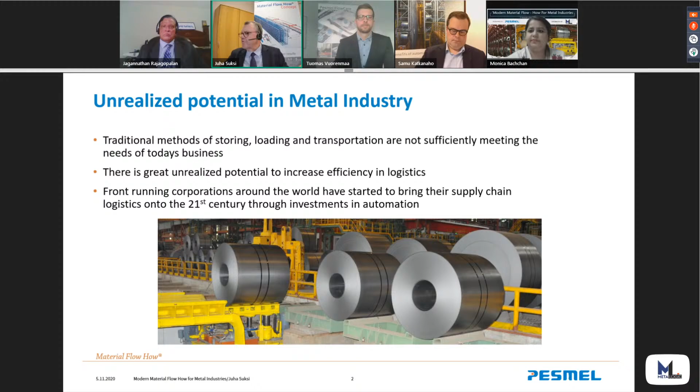Ladies and gentlemen, welcome to the Modern Material Flow webinar for metal industry. There is great unrealized potential to increase efficiency in logistics. Traditional methods of storing, loading, and transportation are not sufficiently meeting the needs of today's business. By investments in automation, the situation can be improved.

What have we learned about logistics? We can see from this image, all the way from plant to port side, that in-plant logistics and finished goods shipping functions influence the whole logistic chain. Trucks and trains transportation times are often less than 50% of the total time. Turnaround and waiting times are excessive.

There is potential to reduce turnaround time by more than 50% in plant logistics and port by equipment automation and Industry 4.0. There is also potential to reduce time on roads and rails by investments in infrastructure and Industry 4.0.

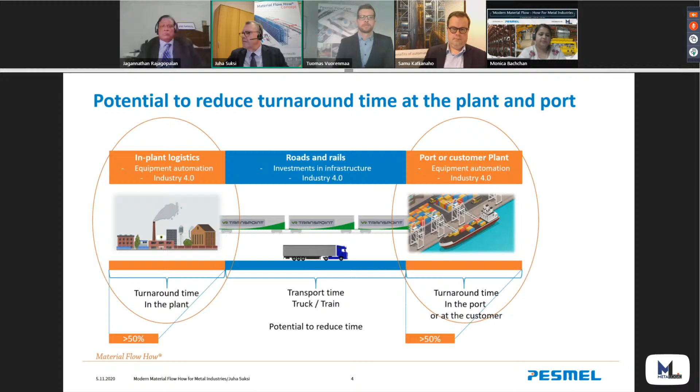So what can be done? There are many things that can be done, but we'd like to highlight the following: in-depth feasibility study, automation of in-plant logistics and shipping functions, and Industry 4.0 system integration and networking.

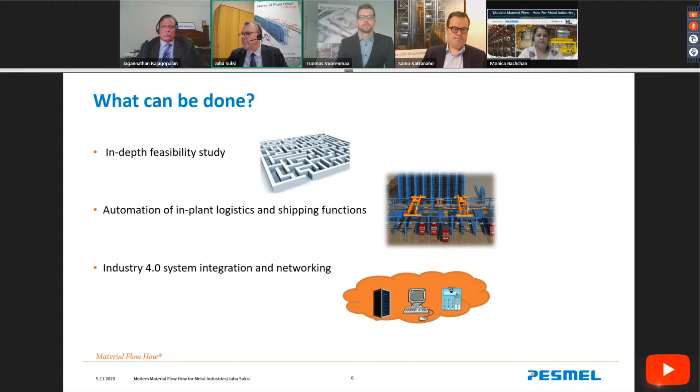During the feasibility study, we can prepare an actual 3D simulation model of production and material flows with real and planned production data, and optimize logistics, buffering, and safety functions. We find the bottlenecks of production, model exceptional situations—for example, if some equipment is on maintenance—and consider future plans.

Simulation will get validation before implementation by comparison of different solutions. It will give better overview and understanding of the processes and logistics, and we can optimize and reduce the number of equipment.

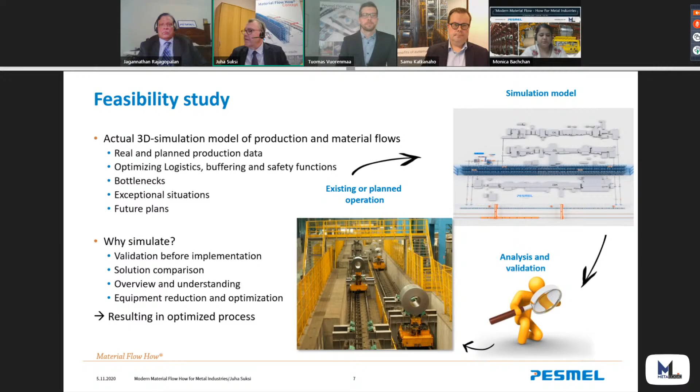The key is the coordinated material and information flow throughout the entire plant. It is beneficial that the internal logistics devices are seamlessly connected to process equipment.

If we compare traditional and high-bay storing method efficiency, high-bay storage needs only 15 to 20% of the floor storage footprint, with 1 or 2 stacker cranes. But floor storage may need many overhead cranes. High-bay storage has easy, precise access to all the products, which may not be the case with floor storage.

Industry 4.0 and digitalization give better control and understanding of every operation and utilize real-time data to increase productivity and improve controlling of the processes and change management.

Industry 4.0 can be utilized for proactive maintenance to identify potential problems before they become major problems, and give instructions on what can be done to prevent them.

GPS systems produce forecasts of arrival times and logistic-related optimization opportunities, for example route optimization and location information.

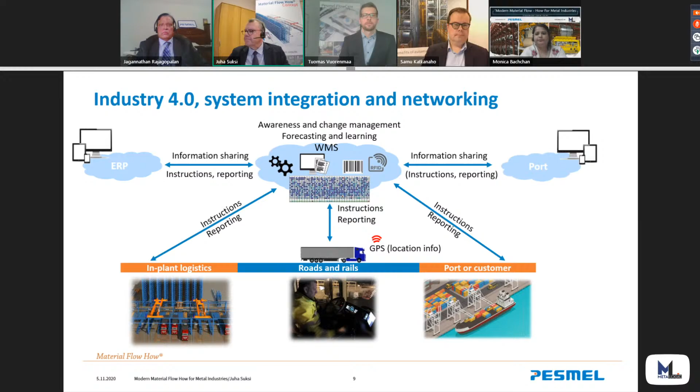One high-bay storage unit can serve all buffering, sorting, and shipping functions. Storage allocation is fully adjustable between HR coils, which can be automatically unloaded and fed to the storage, coils feeding to production lines and back to the storage, WIP coils feeding to the packing and back to storage, and finished good coils automatic loading.

The same principles can be used also for wire rod coils, billets, and sheets.

The warehouse management system is the heart of the automated distribution center, and it enables full control of all material flows inside the mill: real-time inventory, traceability, distribution, and shipping functions. And WMS is integrated to the mill information system.

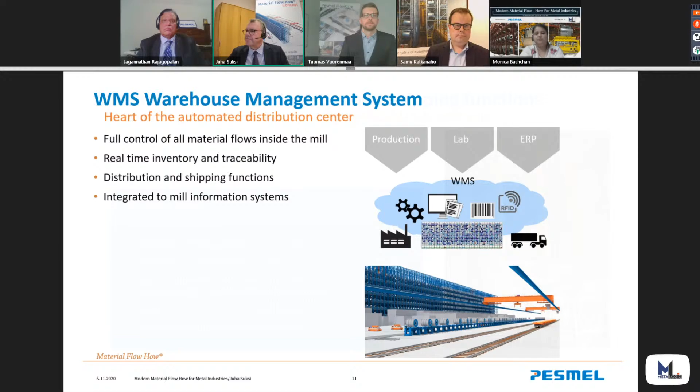As we have been working for the metal industry for decades with many customers, our running corporations are reporting significant improvements from automation in mill logistics and shipping functions, like increased sales, reduction in production cost and capital tied to products, as well as savings and error-free deliveries.

As a summary, and referring to the pictures shown below, there is great potential to increase efficiency along with enhanced profitability in logistics by well-planned and focused investments in logistic automation.

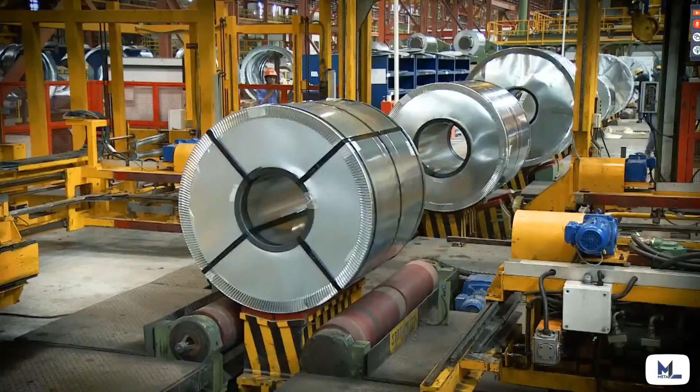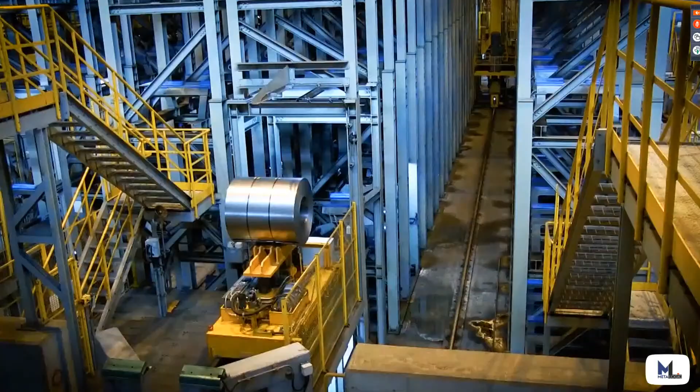PESMEL is a global leader with extensive knowledge of metal industry processes. Our core competence lies in highly automated internal logistic, packing, and storing systems. We design and implement the best logistic solutions in a manner that improves the productivity and efficiency of the entire mill. PESMEL is the master of material flows.

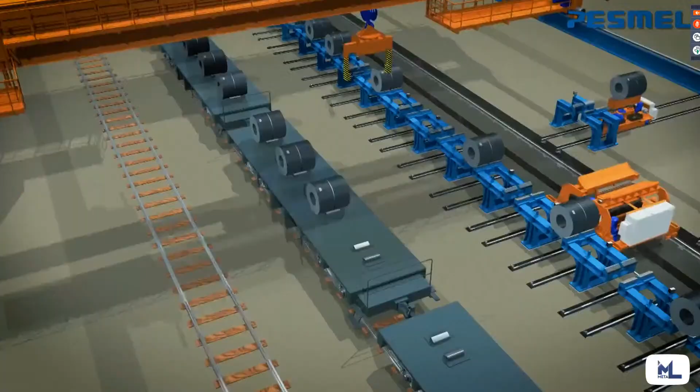At the core of everything we do is our unique material flow-how concept. It integrates all the production processes into an automatically functioning logistical whole. The system can be applied either to greenfield or to existing premises. The material flow-how concept is the optimal logistic system that enables production capacity to be maximized.

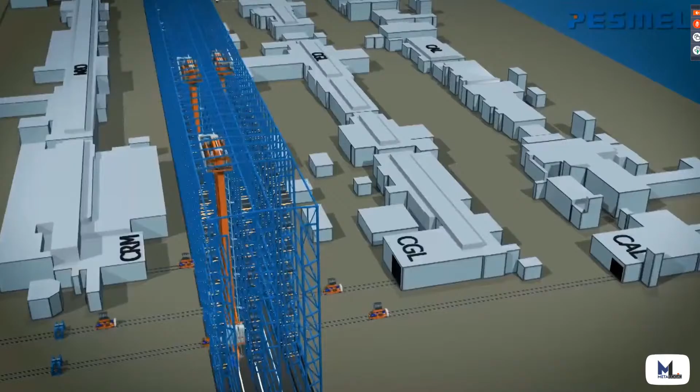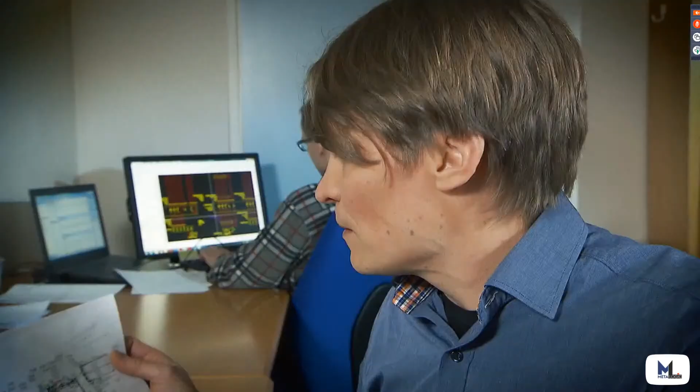First, our specialists familiarize themselves with mill processes and systems. A simulation model is then built based on this information. Through simulation, bottlenecks in production and other potential problems are analysed. Based on the analysis, a tailor-made optimal systems simulation model is then built. All this is done in close cooperation with the customer.

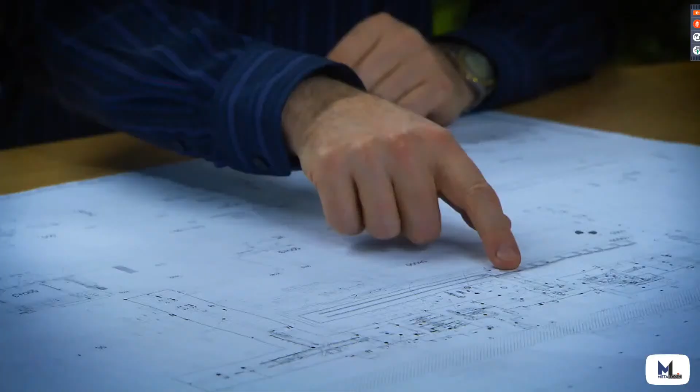Mill processes that can be defined through simulation include product transfers between the processes, intermediate storage, product packing, storing and dispatching of the finished product, and many other issues related to techniques and productivity. PESMEL takes full care of project implementation as the simulation guides all the different phases.

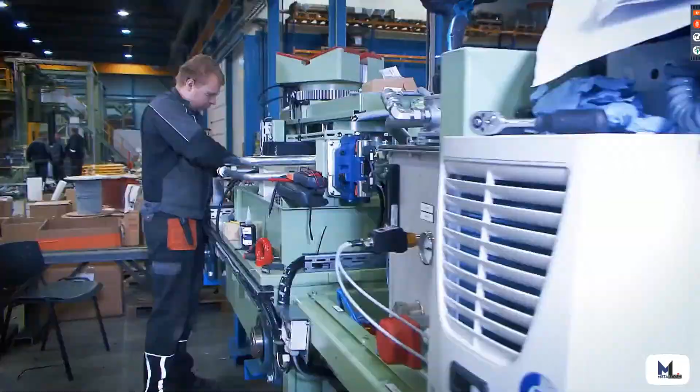One strong area of expertise is our in-house engineering: mechanical, electrical, PLC, and ICT. We build our machines by ourselves. Our engineering and manufacturing meet the highest international and local quality standards and criteria.

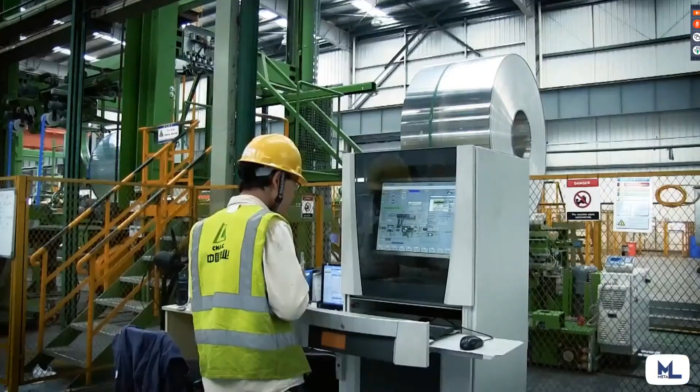The project delivery includes full equipment and system installation, testing and startup. The customer's operators are trained for independent operation, and additional training is available for the whole system life cycle. Our deliveries also include complete documentation.

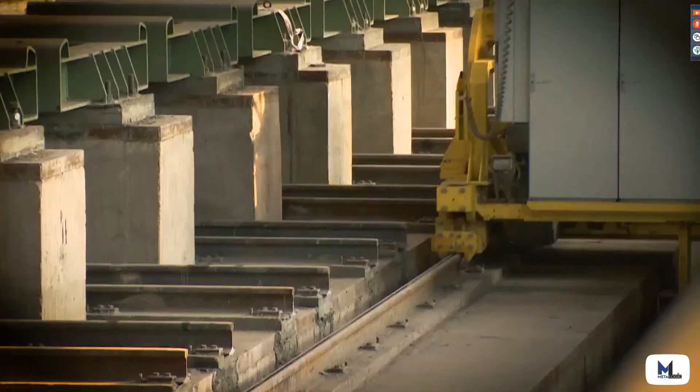An advanced control system manages the material and information flows. This makes heavy, manpower-oriented tasks things of the past. System operation is easy and user-friendly.

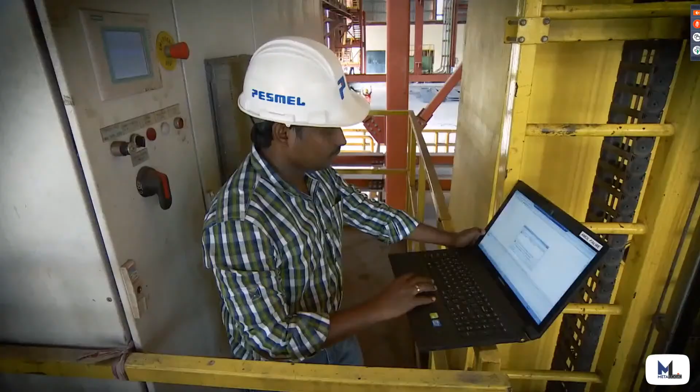The system lifecycle is managed by means of the FlowCare application. It provides current information about system performance, the condition of the equipment, and need for maintenance. This helps the operators react fast and in the proper way. FlowCare offers flexible connection to PESMEL's maintenance and spare parts service.

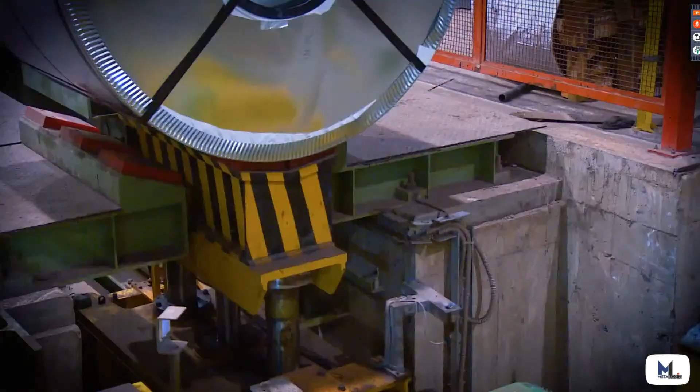PESMEL is your partner in the metal industry. We manage the mill's material flows as well as their optimal integration. Better quality, perfect deliveries, product traceability. Efficiency, reliability and operational safety, with minimized life cycle costs. PESMEL Material Flow-How.

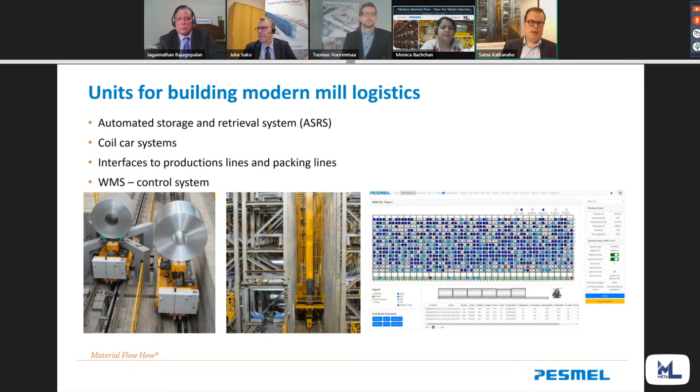High-speed coil cars complementing the EOT cranes for faster transportation, distribution, and automatic feeding. Coil cars shift coils automatically by the production plan and program and are able to handle coils up to 50 tons capacity. Special plastic pads ensure gentle handling of the coils, so no damages. Also, coil cars with turning saddles or waiting saddles are available, depending on the customer need. High-speed cars are also available to ensure higher throughput capacity if required.

Coil cars supplement and complement the EOT cranes and the stacker cranes with the common YMS and WMS. They can operate in crane shadow, so they do not use valuable floor space that much. As said, coil cars can load coils to the infeed point of the process lines and pick up coils from the outfeed points of the process lines directly without depending on the EOT cranes.

So stacker crane is a digitalized vertical crane moving inside the high bay storage racking. It is computer-controlled, able to identify and track the coils automatically at high speed with more throughput per hour. And it can work up to 34 meters high.

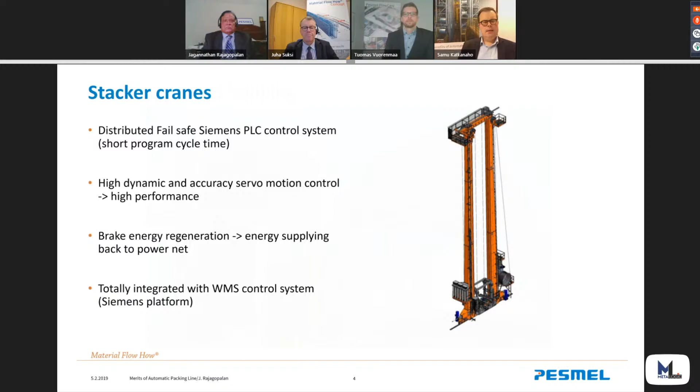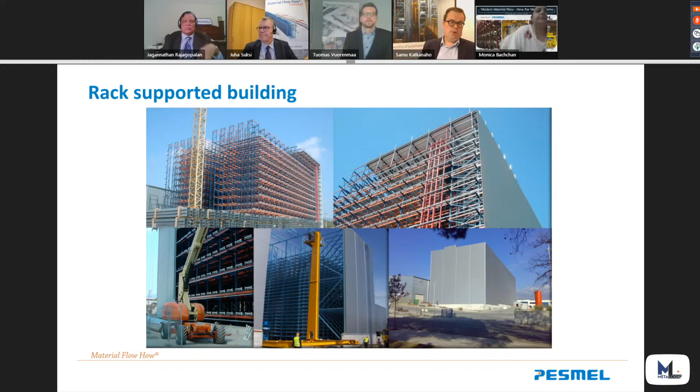So if we compare this typical ASRS to the traditional floor storage system, only 15 to 20% of the footprint is used, as Mr. Juha also mentioned. Only 15% of the power costs and 26% of the operational costs. And no human influence on the process, which also gives the safety aspect. It enables high throughput capacity, easy tracking and full transparency. So your mill can provide fast and error-free deliveries.

Some words about the overhead crane integration with automation. I will tell you the PESMEL overhead crane YMS evolution path. It's like a staircase to automation. So in stage 1, YMS guided cranes. All cranes are manual and no PLC is required. YMS gives the visual guidance and tasking via HMI to operators.

In stage 2, YMS controlled cranes, long travel and cross travel movements are automatic, and hoist movement is manual and controlled by the operator. YMS gives the guidance and tasking, and the cranes need the PLC. And in stage 3, fully YMS controlled cranes are fully automatic. So all movements like long travel, cross travel, and hoist are fully automatic, and no operators are required. Customer also has the flexibility to expand in modules and phases. So as said, this is like a staircase to full automation.

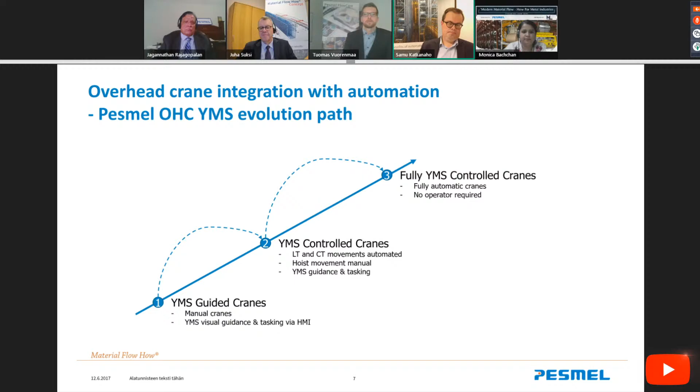As you can see, there are a lot of benefits of modern logistics. Increased efficiency, higher throughput, improved quality, faster material turnover, shorter delivery times and cycle times. You get rid of bottlenecks.

Error-free, in-time prompt deliveries, which also increase your customer satisfaction. Safe environment for the products and for the operators. And flexibility to expand in modules and phases. And PESMEL can help you to create the clear roadmap towards the full automation.

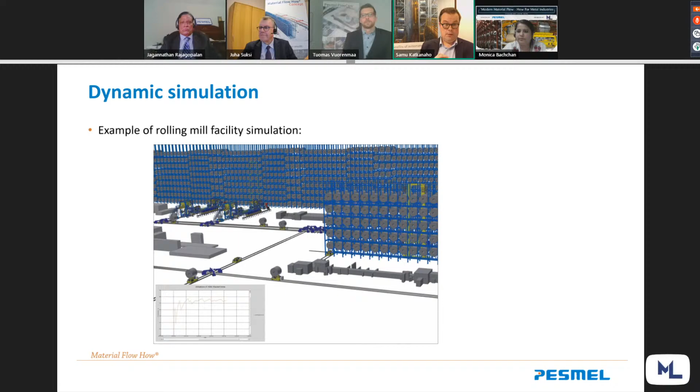Now I will ask Monica to present you the typical video of modern logistics. And as you will see on the video, no manpower is required. So Monica, kindly share the video. Sure.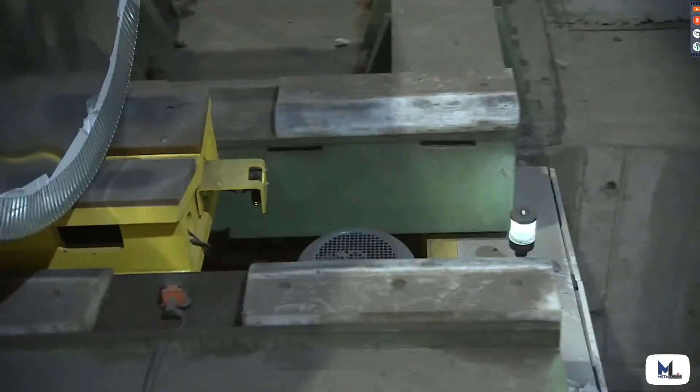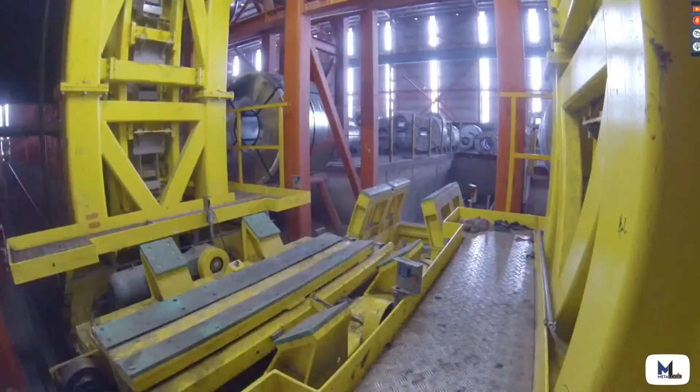And then when outfeeding, the stacker crane picks up the coil and delivers it to the exit point or outfeed point of the ASRS here. We have the moving level, so the overhead crane can pick up the coil directly there at the place we pick up. This is also controlled by our YMS.

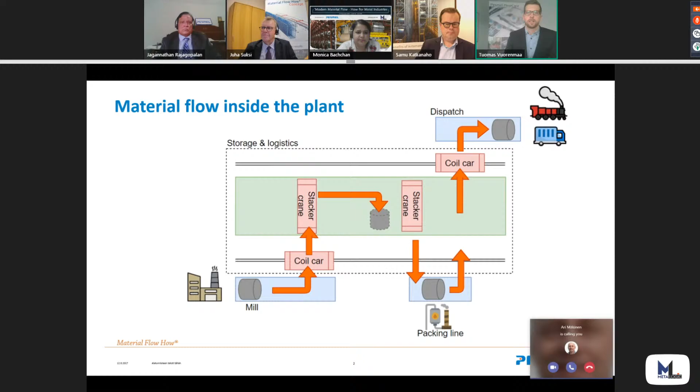My topic for today's webinar is warehouse management system, heart of the metal plant. As Mr. Juha and Samu presented earlier, material flow in a modern steel plant can be quite complex. Mills produce coils that need to be stored until further processing. Coils may need to be processed multiple times, and after each processing, they need to be stored again. And coils need to be packaged before dispatching, and again, they need to be stored in a buffer before dispatching.

The dispatching can be done, for example, via road or rail, using trucks and trains. High bay storage, together with modern logistics, can function as a distribution center, thus simplifying the material flow. The heart of the distribution center is WMS, which controls all the physical devices like stacker cranes, coil cars, coil lifters, conveyors, etc. And it's also responsible for the information flow. WMS makes all the devices work together seamlessly, utilizing all the information available, enabling the intelligent material flow.

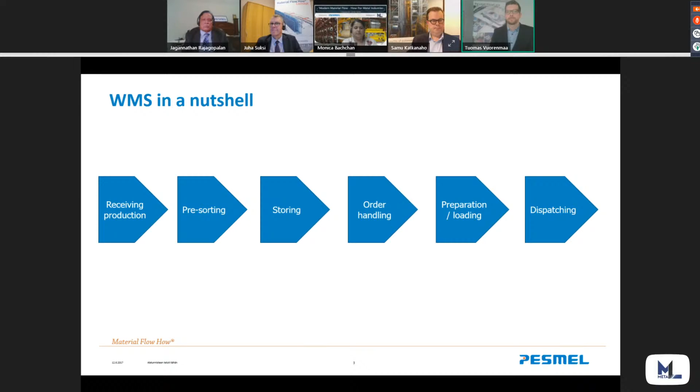A metal plant may have many systems provided by many suppliers. There can be an ERP system, mill execution system, multiple production lines, a separate system for dispatch planning, and so on. Information needs to flow in order to achieve fluent and flexible material flow. WMS is there in the middle, to help get the material and information where needed.

Since WMS needs to communicate with many different systems, various interface types are supported. For example, REST APIs, queuing systems, database links, file sharing, and TCP sockets, to name a few. WMS is working as an extension of production and dispatch planning, making sure the plan is executed correctly in the physical world.

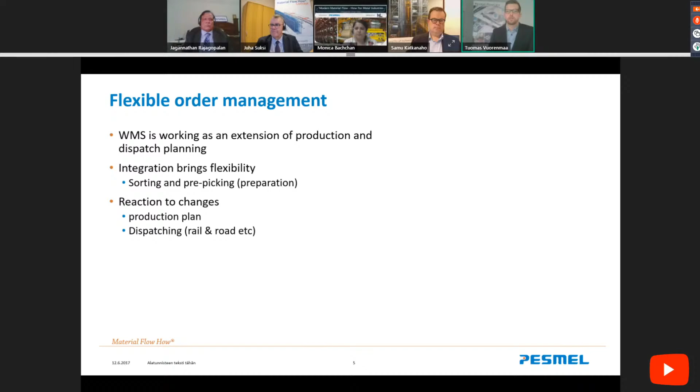WMS integration brings flexibility for sorting and preparation and the ability to react to changes. Production plan, for example, can change, so WMS needs to prepare another set of products. Trucks or trains may break or they are cancelled, so the prepared products may need to be taken back to storage and new products to be prepared to the loading area.

WMS tracks every single movement of each product, all the way from the takeover point to the dispatch vehicle. And all movements and events can be traced in history step by step. Sometimes it's also necessary to see production and dispatch orders and if changes have been made to them over time. Also, all user actions are logged, and all this is because we want to provide full transparency and give the best understanding of the whole system.

Tracking information can also be shared to other mill systems if necessary. Mill execution systems or ERP systems may need to know where each coil or product is located for planning the next processing.

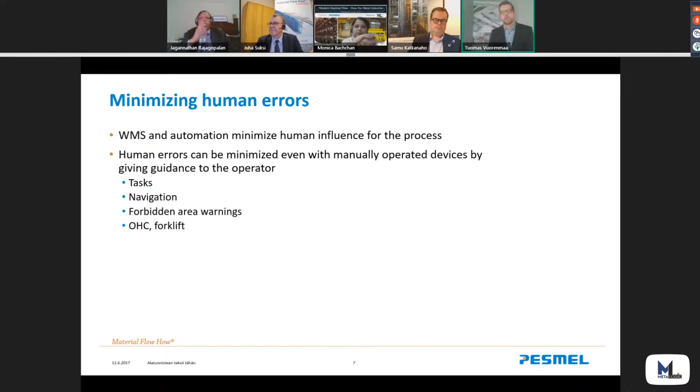WMS and automation can minimize the human influence on the process. And human errors can be minimized even with manually operated devices by giving guidance to the operator, like tasks, navigation, warnings about forbidden areas, etc. These devices include overhead cranes and forklifts as an example.

High bay storage and logistics can be supplemented with additional floor storage. WMS can be extended with YMS functionalities. This extension includes all necessary user interfaces and device control functionalities for overhead cranes or forklifts. Mr. Samu mentioned the YMS overhead crane evolution path, and that is supported with only minor changes to the WMS when moving towards more automated levels of overhead cranes.

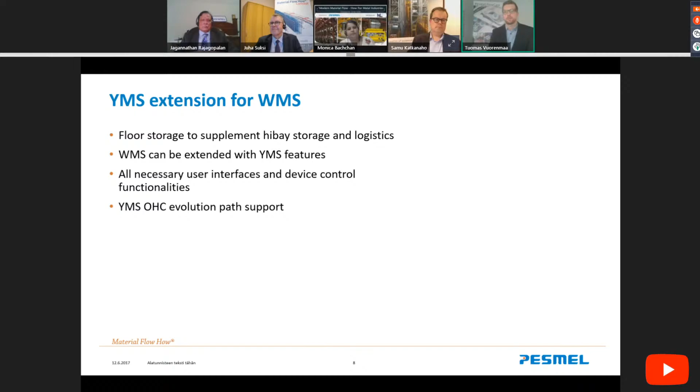WMS collects statistics and other data of the system. All the important data is available for all levels in the organization, from operators to top management. And all data can be used in reports, and reports can be exported into a file for later purposes. WMS's central position allows it to give a wide and transparent view into the plant's overall process. It's a tool which can be used in plant development. The data can also be integrated into different BI systems.

To sum things up, the complex process of a metal plant can be simplified with high bay storage and WMS. In Mr. Juha's presentation, there was a sample case where a single high bay storage was used for WIP coils, finished goods coils, packaged coils, and as a dispatch buffer. And the whole system was controlled by WMS.

WMS can and should be integrated into all mill systems, and many types of interfaces are supported. WMS is a platform which can be extended based on customer needs, for example, yard management system and floor storage functionalities. WMS provides a full, transparent view of the plant's material flow process.

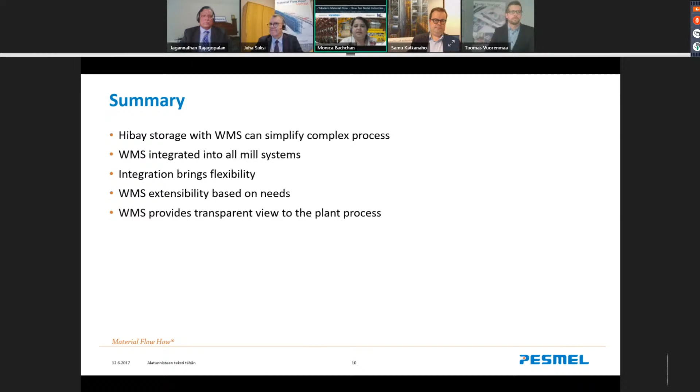Thank you. And Monica, I think you continue from here. Thanks. Thank you so much, Mr. Tuomas. Moving on to our next panelist, we have

Mr. Jagannathan Rajagopalan. He's managing director at PESMEL India. A little introduction about him. Mr. Rajagopalan holds a master's degree in mechanical engineering with specialization in project and commissioning management. He has 20 years of experience as a senior engineer at Bhilai and Salem Steel Plant of SAIL. Mr. Rajagopalan has resided in the USA since 1996 as Vice President of Sales. He has been exposed to international marketing and sales with respect to process and finishing lines.

Upon joining PESMEL, he has been responsible for marketing and sales in India and the USA, having established a customer base, particularly in the metal sector. Mr. Rajagopalan was instrumental in commencing PESMEL's Indian operation in 2007 to address projects and after-sales service. Mr. Rajagopalan has over a decade of history in PESMEL and is currently Managing Director of PESMEL South Asia. Over to you, Mr. Jagannathan Rajagopalan, and I request you to please unmute your mic.

The material has to go through various transportation hurdles and multiple handlings. So what is needed is obviously perfect and efficient packing. Let us see the components of packing and the objectives. The most important thing in a packing system is not the initial cost. Packing is a different kettle of fish compared to the process lines. In a packing line, the operating cost is the predominant factor, and it can be monitored and controlled by selecting a proper packing system with automation and a lot of features.

For perfection as well as efficiency, the packing system should have more throughput. For example, manual packing can have 5 to 7, semi-automatic 10 to 12, whereas an automatic packing line could have 20 plus, depending on the coil size and the packing philosophy. The quality of packing is very important. Automation with least manpower is always welcome, not to save manpower for its own sake, but mainly to ensure error-free, safe packing with quality.

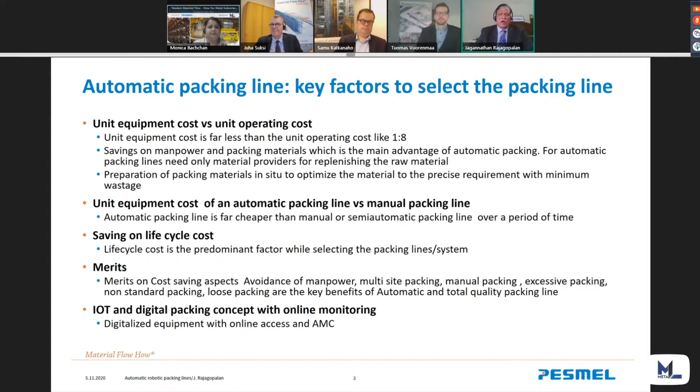The frightening factors for the coils are: one is moisture, the second is oxygen, the third is contaminants, the fourth is mechanical damage. Each one has a protection, and there is a method to protect. More than this, you don't need to do anything excess, and everything is scientific. It is not whims and fancy, or emotional packing that my coil is very safe. There is a scientific way of packing. That's what we do. That's what we program. Of course, IoT, I already emphasized on that.

I'm sure there are some commercial friends. Normally, the equipment has to be chosen by value, not by price. The initial price is not the price. It is a very deceiving item, something like a small needle hole. But ultimately, the operation cost every year will be so high.

You see an example here of total cost of ownership, where the operating cost of a manual line, or even a semi-automatic line, surpasses the unit cost of an automatic line within 1 or 2 years, and that could ensure you a faster ROI. So please understand, you always need to consider the value of any equipment you buy, not the initial cost. Value always gives you back and avoids you paying more money every day.

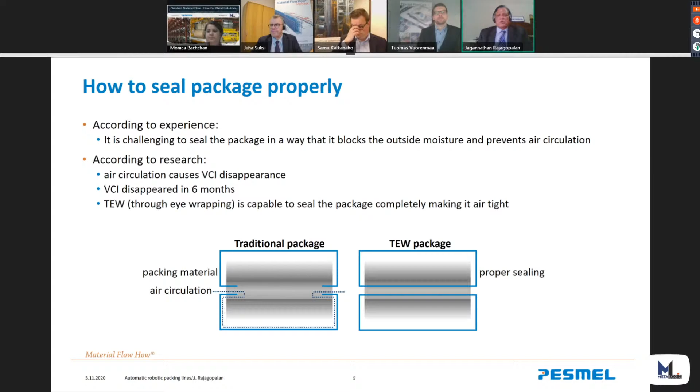So the airtight packing we explained, and what is the advantage. But one question, if you could have an airtight packing, then why do you want to have VCI, a vapor corrosion inhibitor or volatile corrosion inhibitor? Volatile means it evaporates immediately, so the chemical evaporates and drives away the oxygen and moisture in the gap, so that the coil is protected. But if it is tight, there is no job for the VCI.

We could as well pack with crepe paper, which is 3 times cheaper, and we have done experiments and customers have accepted it. In CSC in Vietnam, we have done experiments, even aging experiments, and we have found that it is as good as VCI. VCI is more psychological.

Nevertheless, only for one application, especially in auto body applications, for certain particular components, VCI is mandatory. Otherwise, 90% of the applications, crepe paper and stretch film should be able to serve the purpose. This is really a good thing, and we have actual experiments done and results.

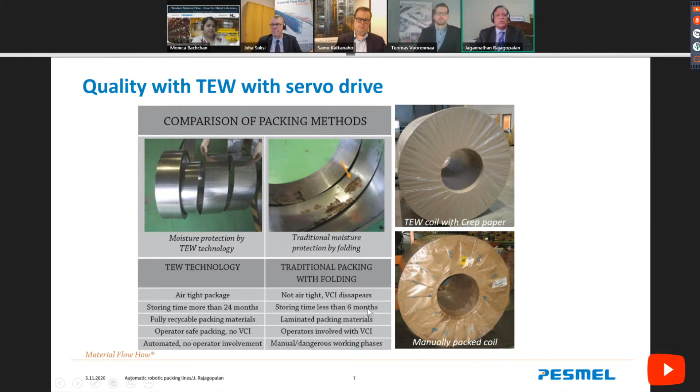One more aspect is many times customers find it difficult to remove the packing. So you shouldn't do such a packing that it takes more time to remove than the time it took to pack. It should not be like that.

See, now they're all dealing with static electricity. When you wrap, static electricity is developed. If you wrap in the proper way, then with an automatic packing system, when it removes it, sometimes even with a noise, it comes off in no time.

And also today, friends, the packing material suppliers also collect the material, because today most packing materials are recyclable. So the supplier is tempted to take it back, and if it can come back to him, he can also be benefited, and the customers are also benefited.

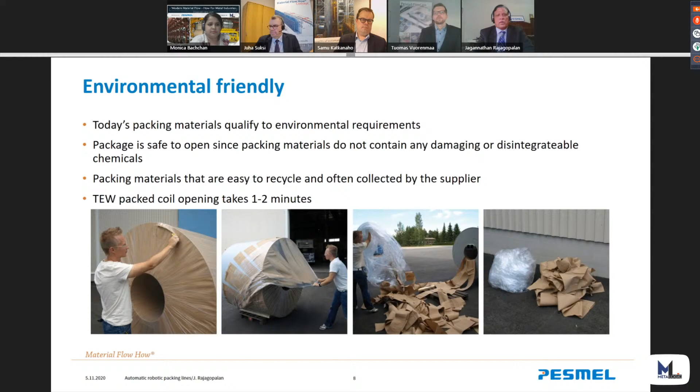Another important aspect is in situ preparation of material, which we did discuss about. In situ preparation means we don't keep a big inventory of packing material, because the raw material is far cheaper, and preparing it at site as required is also cheaper.

The quantity is also controlled and monitored. Another aspect of automatic packing is flexibility to use standard material. There are cases where they specify the spool in such a way it is 2 3/4 inch, and all other spools are 3 inches, but some machines are given with 2 3/4, so you have to go only with that supplier for the material.

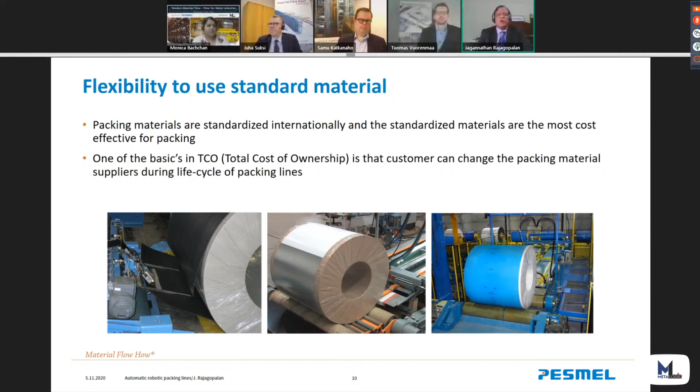So all these are not correct. There should not be any monopoly. There has to be flexibility for the customer, because the customer should have the flexibility to choose the material to save money.

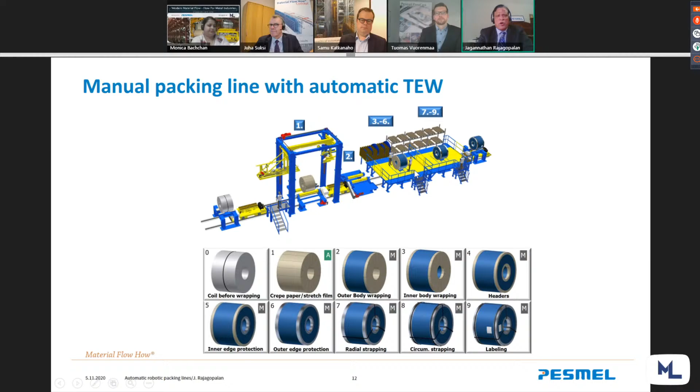Now I come to phase-wise implementation. This is a manual packing line where only the wrapping system is automatic, and all the other paraphernalia can be partly manual and partly semi-automatic. If you go further, the same thing could be automatic in many cases, except one station. So in the previous one, there may be 7 operators; here, there may be 3 operators.

Why are operators required? Mainly because of flowering, and especially with regard to HDP material, sometimes you have to flower, so that way you need some people. But even that has been developed with automation now.

And then comes an integrated automatic robotic packing line. It looks so complicated, but you will find it very simple when you see the video. As such, here you have the advantage that the packing line takes the incoming coil and the outgoing coils are taken out.

There is no load on the crane. And also, friends, if you plan properly in a greenfield project, you could as well make the packing line as a transportation media, and the packing line can take it from the process line exit to the shipping bay by the line itself, which has been done in one of the plants in Chicago.

They were asking how to save this double handling, triple handling, because the lesser the handling, better the coil is. The coil should be handled minimum before packing. After packing, it is maybe okay, but that way, this packing line itself gives this volunteer service if it is configured properly.

That's the reason Mr. Juha, as well as others, emphasized on the importance of simulation, because simulation is one which gives you an opportunity to see what you want to buy without spending a pie. So that is the advantage of simulation, which you should definitely ask for any suppliers.

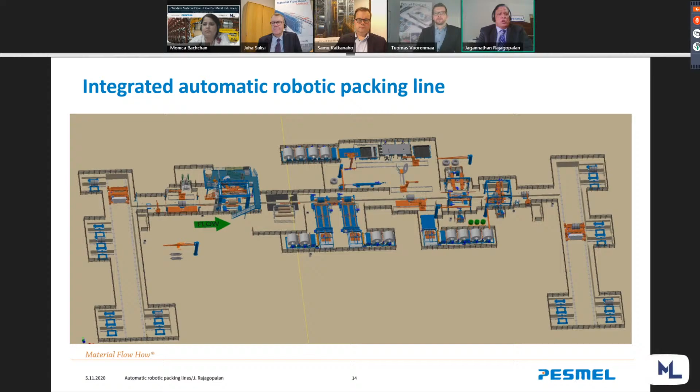To summarize, I need not summarize again because I told invariably all the points, but the key point is the saving of the resources is possible in packing line. So the return on investment is possible and faster. And of course, total protection is there.

And also the flexibility, avoiding dependence on EOT cranes, and also transporting the coils across the bay, as I told you. And the most important thing is the fastest ROI, and automatic digitalized packing lines are available for all the other products also.

So friends, this is message for the day. Please remember, in technology advancement, never run the relay already run by others. So today we are not washing clothes mostly by hand. Today we don't wash utensils by hand. And there are everything we adopt the modern technology.

Why not on packing? The packing is a monotonous job. People are unnecessarily being tortured. And it is better to definitely utilize this automation, having known today that automation is the cheapest option if you consider the life cycle cost saving. Automatic packing line is the most affordable, friendly, proven, and economical packing line if you consider the total cost of ownership, assuring total quality, total safety with enhanced productivity, and most importantly with the IoT.

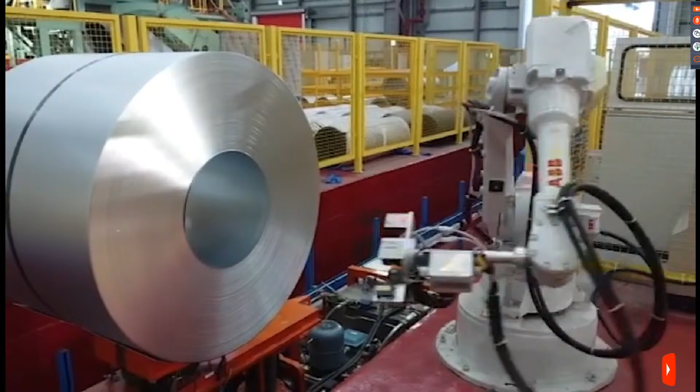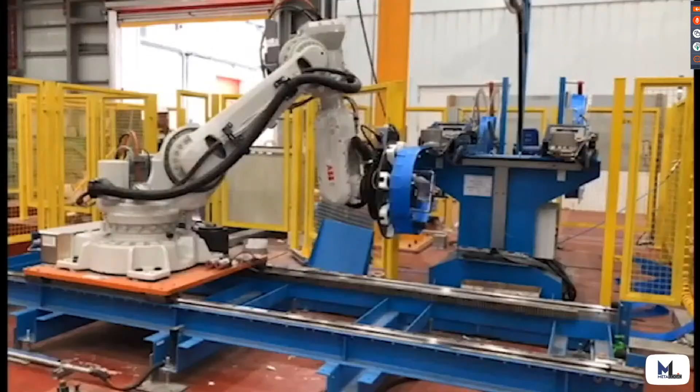Friends, what you see here is just like in your gate main security. This is the security robo. It doesn't allow a coil if the coil ID is not okay, because there can be some mandrel kinks, depending upon the line, and it checks that the ID is clear for the shuttle to go through.

And there are actually 7 or 8 robos in this line, some are 6 axis, some are 7 axis. And robos are so gentle, they touch the coil as if it is a child, and it doesn't damage, it doesn't hurt the coil, and it embraces it. Every item it puts very gracefully.

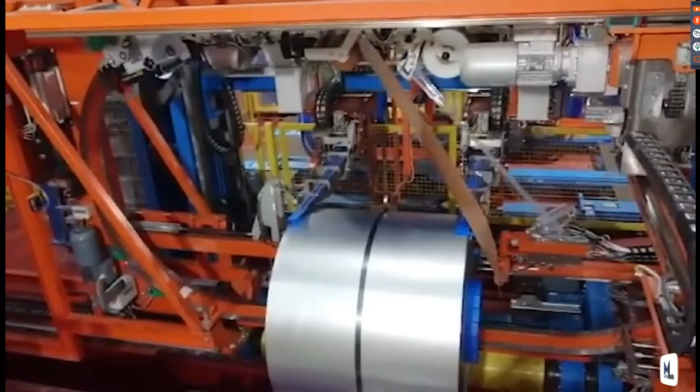This is an automatic through the eye wrapping system with servo motor, and you could see here the crepe paper and stretch film being wrapped, and the program is done in such a way that the paper, having more density, gets over exactly when the coil is over, the spool is over, and then another spool goes up, so that not even a little of paper is wasted. Normally, in many cases, you could see half spool is wasted or 3/4 spool is wasted. So these spools are also being recycled and then put as a fresh spool by the supplier.

Now you see there is a double sealing by infrared sealing, and you could see many times in the trucks some coils with the open package, that you could never see in this type of system. And you could also see there the OD edge protector is also put simultaneously.

This is where the body wrapping is being planned, and unlike the conventional system where multiple body wrapping material coils are kept, here we keep only 2 coils. Instead of cutting on the length, we cut it on the width, so that for any coil size we could cut it according to the width, and we just join them with a transparent glue.

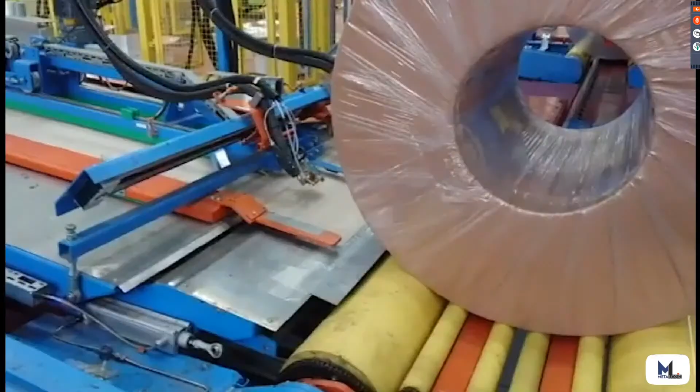There is no big issue because it is only meant for mechanical protection. Here you see the protective material being put first, and this material is normally put a little less than the width, because there is going to be an edge protector, so you should not waste material. If you save about 40 mm on each side, it's also saving.

Then you put the metal over this, and you see how tight it is. Then comes the 7-axis robo, where you put the side disc, or this could be also metal, depending upon the packing philosophy and need.

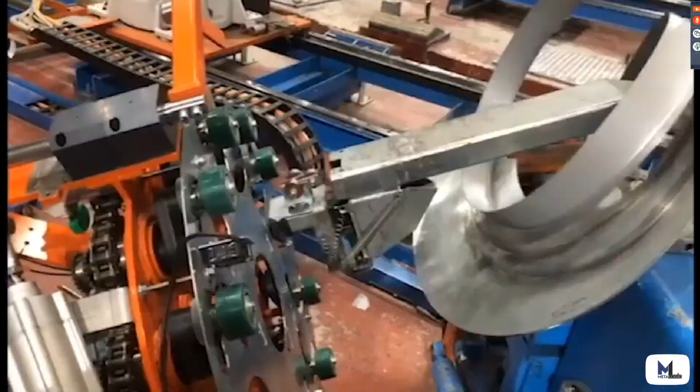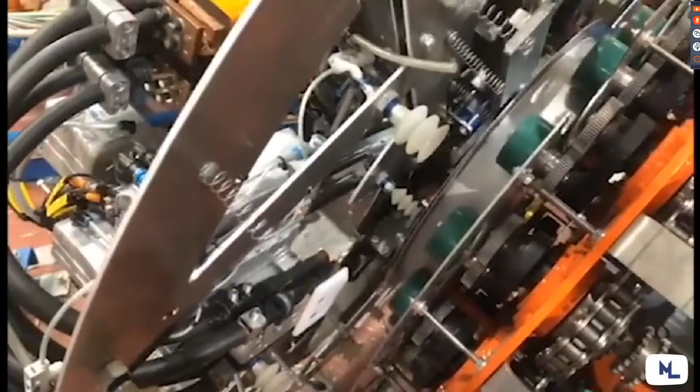This is an ID disc, ID protector being made in situ, and this is normally HR material, mainly because it should withstand the C-hook or the tong. Especially, in a coil the telescopicity is either in the beginning or the end, because the centering device doesn't operate very well when the speed of the line is less. So the edge protector is normally made with a thicker material for the ID.

This robo fixes it with such precision that the edge protector has to be made with precision, as well as fixed with precision.

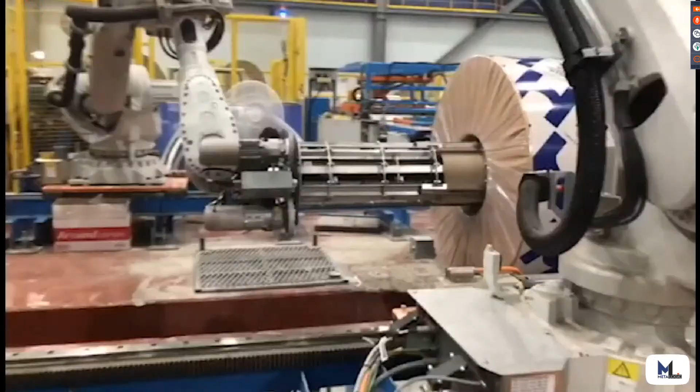So there is our supervisor, possibly at the testing time, and this is actually us inserting the ID spool automatically, and the side disc is being fitted perfectly.

And the robos work synchronously as a team without taking any time off.

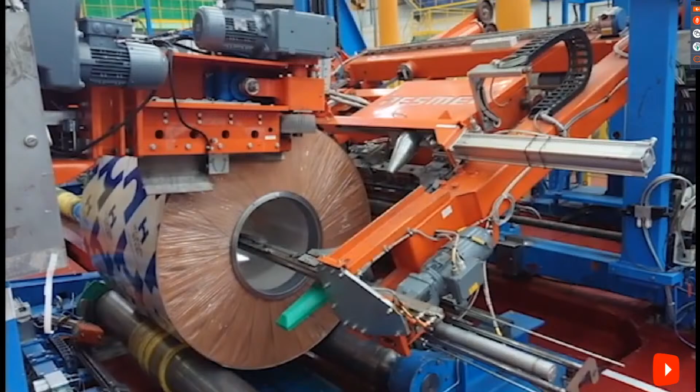Here you could see in situ OD edge protector being fixed, and there is also a device to ensure that the OD edge protector is not loose, it is tightly adhering to the coil. The conical device is meant for that, and that way it is also uniformly making it tight.

And you see there is also an edge pusher to ensure that the strapping is done properly with nothing coming out at the time of strapping.

And this is the OD banding or OD strapping. This robo is a very sincere robo, it could actually affix the label in different sizes, A4 or half the A4 size, and also at more than 40 locations.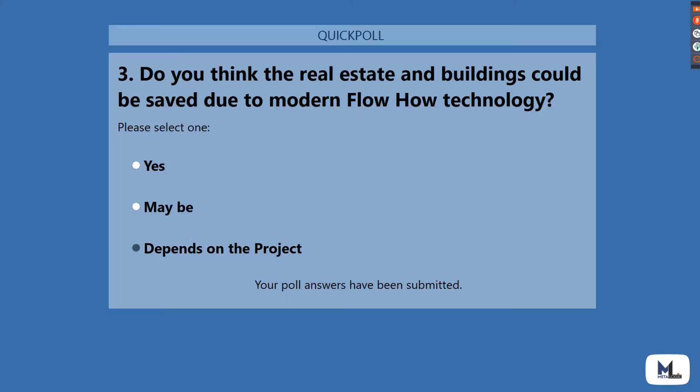So 44% of the audience feel yes, 5% feel maybe, and 51% feel it depends on the project. Well, this shows a little mixed view. I request our panelists to please respond and comment on the answers. So 51% feel it depends on the project, while 44% feel yes. Please unmute your mic, and I request our panelists to respond.

Yeah, if I could comment on that, it is actually the correct statement, because it depends exactly on the type of project, especially whether it is a brownfield project or a greenfield project, and also depending upon the number of systems they may adopt and the requirement of these systems. So it depends upon the type of the project and especially the individual assessment on this.

That's correct. Anybody else like to comment? Mr. Juha, Mr. Samu, or Mr. Tuomas, anyone else like to comment on this? Or shall we go ahead? Only one more point. Sorry, Monica.

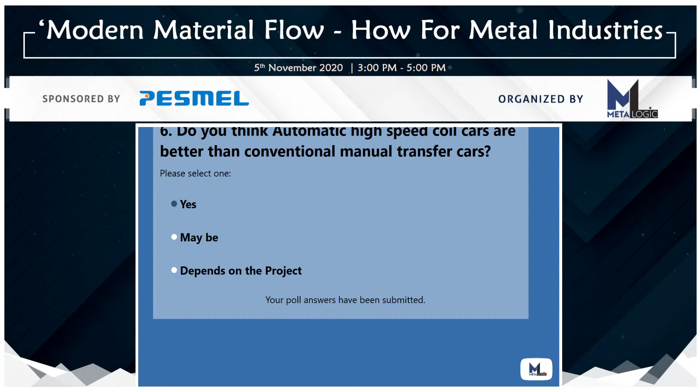With this, we are moving on to our next poll question. Audience, on your screen, please vote. So our next question is, do you think automatic high-speed coil cars are better than conventional manual transfer cars? You have 3 options: yes, maybe, depends on the project. Please be fast in voting.

Here are the results. So 87% of people feel that yes, automatic high-speed coil cars are better than conventional manual transfer cars. 2% feel maybe, 11% feel it depends on the project. I believe the 11% is probably considering the size or the kind of project. Also the throughput. Yes.